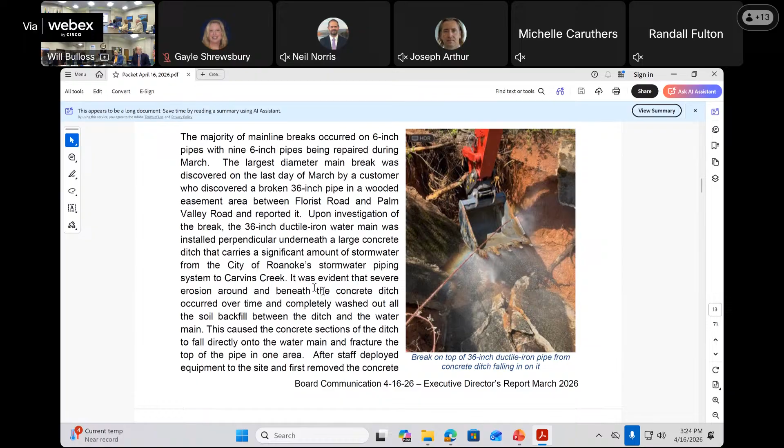It's every month, and we do quite a lot of line location work. We also contract with the Roanoke Valley Broadband Authority to locate their fiber for them as well. It's just a way to help them out.

One thing I wanted to point out here was we saw a pretty good jump in tickets in March, similar to what we saw in March of 2023. Line location tickets are a good leading indicator for future development. When engineers and contractors are calling in for tickets, that means construction's about to happen. You can see a trend here where we had a dip, and then construction tickets rose in March, which is the traditional time people start calling in because they're planning to do construction in the summer.

So there's a lot there to get to the point that we think construction activity is going to be heavy this summer.

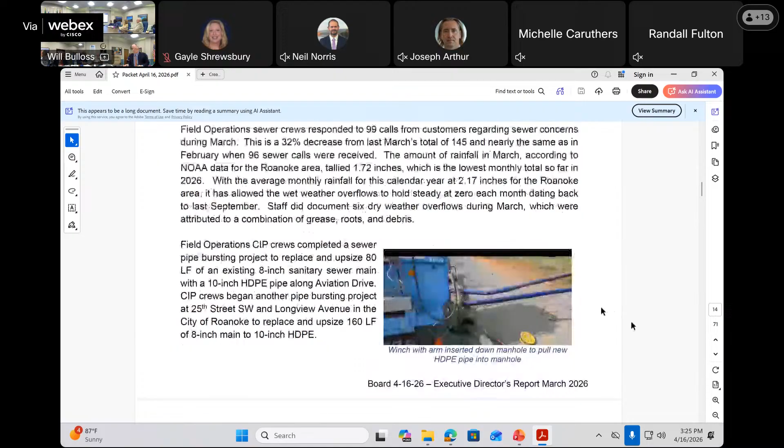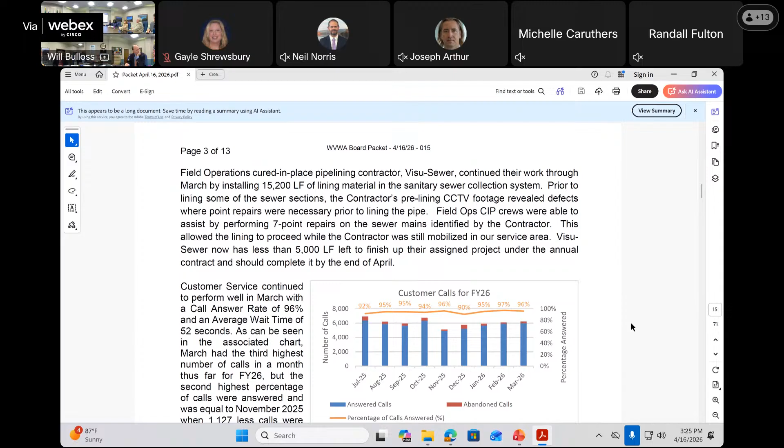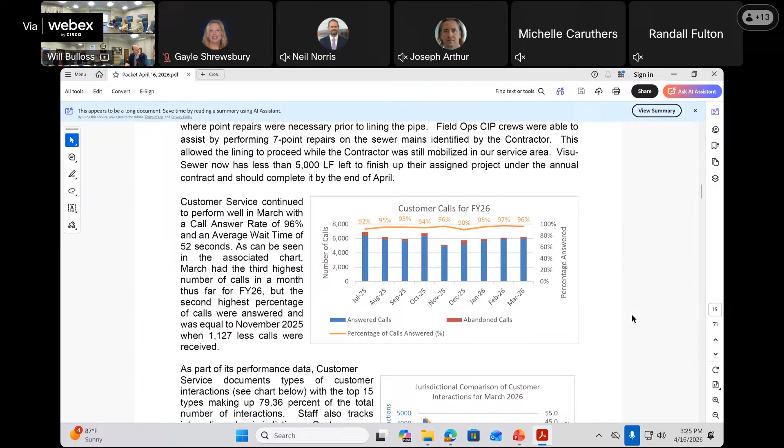Liana's team, this is on pages 3 and 4. In addition to all the other things they do in customer service, one thing they track is the types of calls we get. At the top of page 4, there's a graphic showing how we categorize those calls, and we also categorize them by locality, so we're keeping track of both the types of calls and the locations they're coming from.

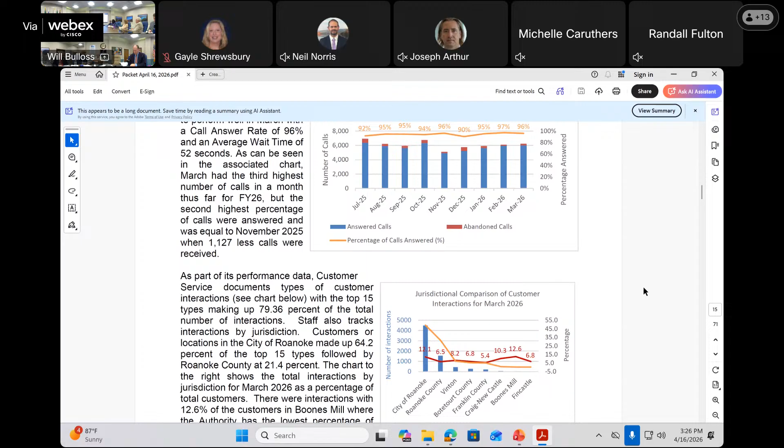She's got a list of the top 15 call types we saw through March. This is pretty typical most of the time. You can see most people are calling with an inquiry about the bill, a transfer, or how to restore service, possibly because they've been disconnected for non-payment. You can see some of the other types of calls customer service gets in a regular month. Liana, did you want to add anything?

Yes, as we get into the summer months, the three months, you will see how the transfer service notes increase. That number on the...

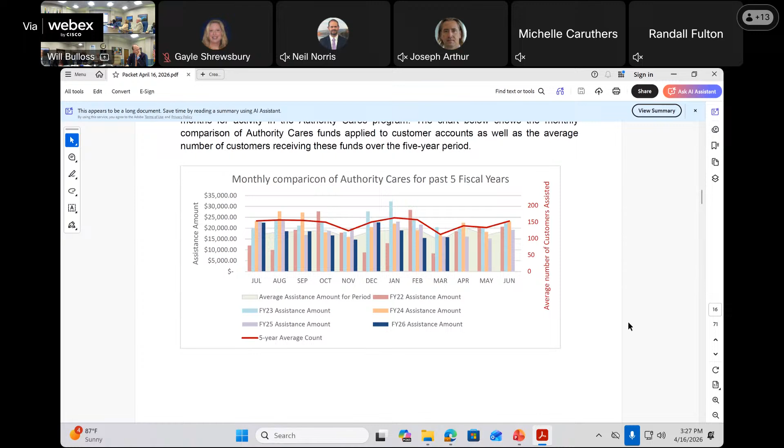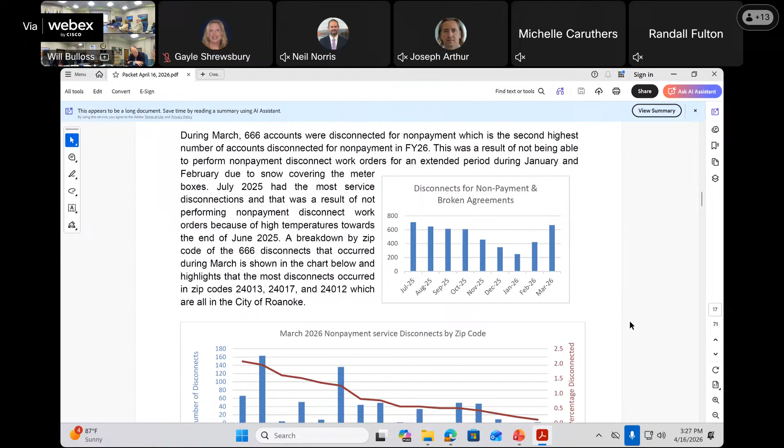On the next couple of pages, you can see information about our Authority Cares program and the number of disconnects for non-payment. We did have a jump in March because we weren't doing a lot of that during the winter, so some customers were able to ride along a bit, but we did see a jump there. Again, it's also broken out by zip code.

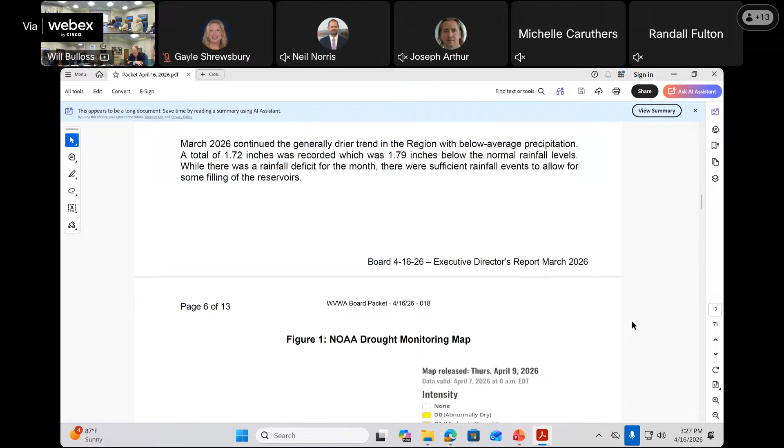Page 6, it was mentioned that it is dry out there. A good part of the area we're in, and a good part of Virginia, is in stage 2 drought. Fortunately, none of the Commonwealth. The graphic that came out today has those yellow, light tan areas showing moderate drought. There's a pretty good sized drought going on throughout the southeast part of the country. In the lower part of Georgia and northern Florida, they're in an exceptional drought, that D4 range.

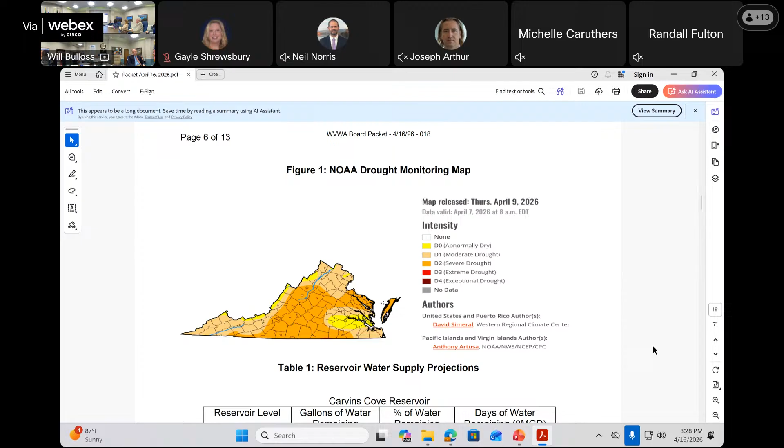The good news, which we talked about a little last month, is that the National Weather Service Climate Prediction Center, based out of Asheville, North Carolina, is again predicting a weather pattern flip, going from a La Nina year to an El Nino year. For the Mid-Atlantic, looking at their climate charts, that means significantly above average chances for rain in May, extended through October. So we're expecting a wet summer and early fall with that flip from La Nina, and we'll likely see some relief on the drought.

We have a long list, I think, of programs people don't qualify for here. Typically we don't have a lot of criteria to qualify for us; it's usually that they've already...

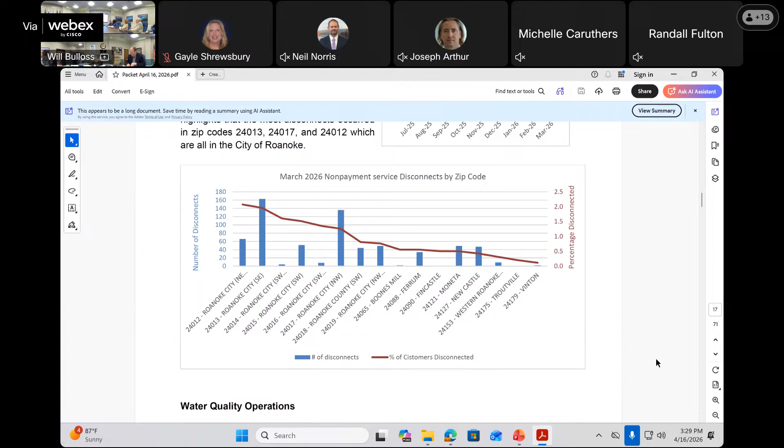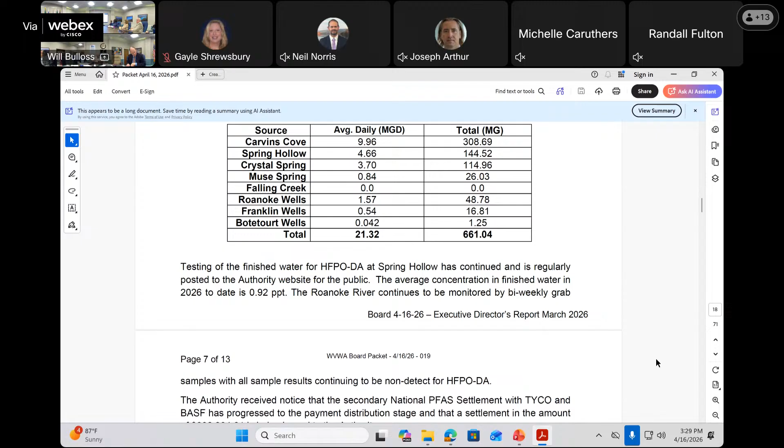Do want to point out though that the reservoirs are still looking pretty good. Carvins Cove is at 78% capacity, 78% full. We've really added a lot of water at Spring Hollow. We're at 90, the report says 94 there. I think it's dropped a little bit to 90, a little less than 94. It's 93 there. So looking good again as far as storage goes.

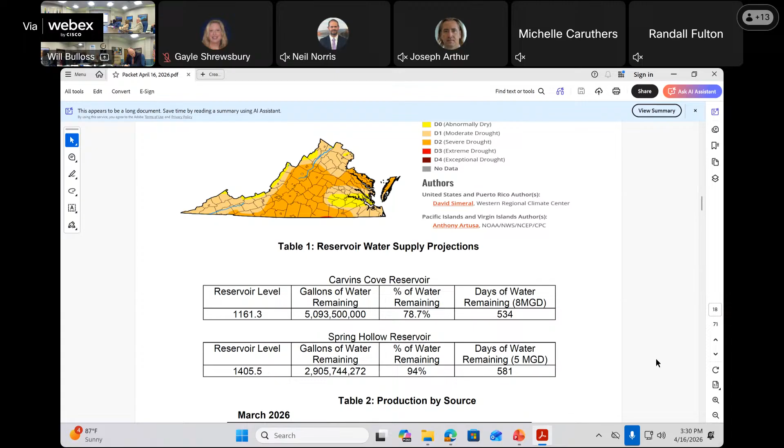Scott Shirley let us know he'd gotten notification from the national PFAS settlement group put together to handle this class action National Settlement Center. Two of the other participants in that suit, Tyco and BASF, were smaller organizations compared to DuPont, Chemours, and 3M, but they have a share in the cost. We're going to be receiving a payment from them soon, $602,000 for the settlement. Actually, we got notification the check's been issued for 400-something thousand of that amount, so money continues to come in associated with that class action.

We are working quite a bit with both the health department and a number of water systems in Franklin County to transfer those over to the authority. I just got contacted by another one that would like to turn over their operations to us as well. Don't know if it's just the cost of operations. The one that recently reached out is having a bit of a problem with their well, so they'd like to start buying water from us. I think we have at least 4 of these in Franklin County at this point, and they're all pending.

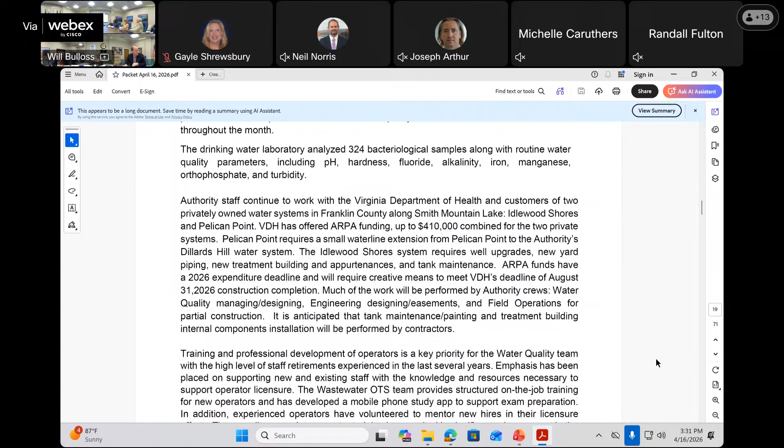Very excited about the fact you can see at the bottom of page 7, we had a number of employees pass either their water or wastewater operating licenses, all listed there. So obviously getting our folks licensed and higher licenses. The licenses, 1 is the best, it goes 1 down to 4. You can see we have some new employees that just got their 4s, and some employees who've been with us a few years that are just getting their 1s. So very excited about that. And there's a promotion that goes with that licensure.

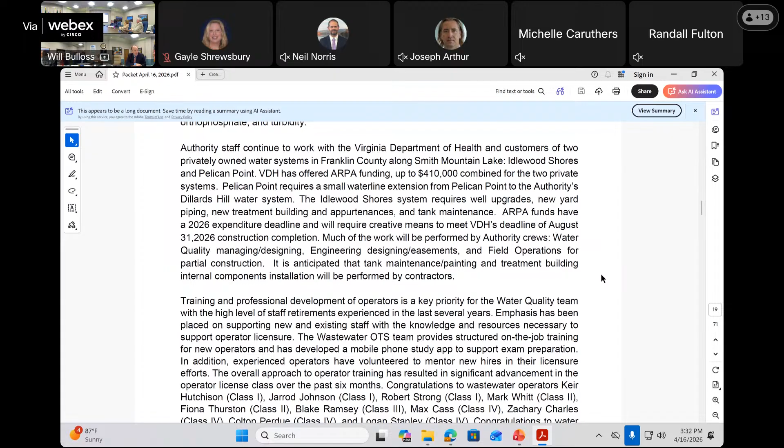Yeah. Before that, actually they're trying to get us by August 30th. Oh, I know why. Yeah, so it's gonna be tight, but we're trying. Oh, but they didn't. Yeah, exactly. Yeah, okay, sure. Yeah, they have essentially leftover money from other projects, they said.

Top of page 8, I think we've mentioned we had some screen failures up at Spring Hollow for the filter units up there. Those screens have come in, so we're starting to replace them. And there's pictures of our team going up there doing that work.

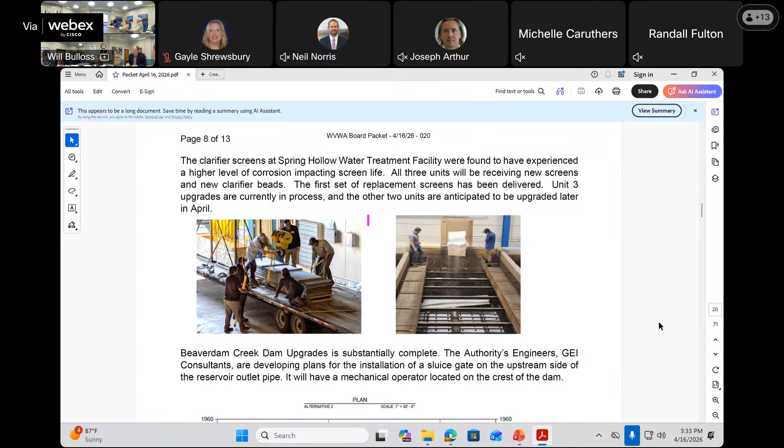Page 9, I just want to point out, it's a small item but I think we're pretty proud of it, that picture with the Ferrum water plant, the 2 white tanks there. We took that facility over a few years ago, and it operated well, but maybe wasn't, I'll use the term Gary liked to use, wasn't as spiffy as we like to see it. So we had a little project there to do some repairs, some painting, refinish the floor and everything like that. And it really has turned out nice, the facility looks really good.

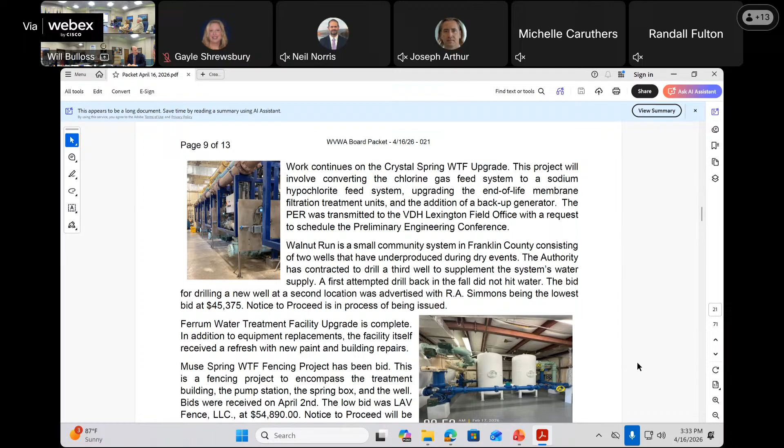Then at page 13 under administration and engineering, I mentioned this to the IDEA team last week, but we had a really successful high school apprenticeship recruitment season. A lot of that goes to HR, Neil and his team, especially Mackenzie Wilcox, and Sarah and her team. We were able to sign 5 new apprentices. We had 9 or 10 apply, interviewed 9. You had to come on the tour along with your parents that we did in February, and that was the day it was bitterly cold. So if you showed up for that tour and went around all our facilities, you definitely were interested in the job, but it had a really good turnout. We have a long history with the school systems on these apprenticeship programs, and there are so many other groups now doing them that it's become a bit of competition to find apprentices. It's a little bit of a challenge for us, so we have to be creative and show them what we do to get them interested. We had a good turnout this year.

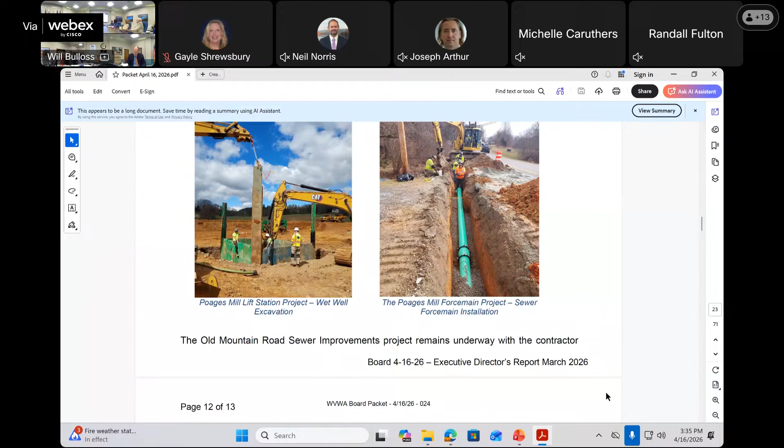This is something I'm excited about, top of page 11. We are about 400 feet away from finishing the Melrose Avenue Waterline Improvements Project 1B. If you remember, we got a bunch of financing funds from the bipartisan infrastructure bill, and we divided those up into Project 1A, which we've already completed, 1B, which we're about to complete, and then we have a Phase 2 project we're working on as well. We've replaced 16,000 linear feet of pipe in the Melrose neighborhood. Congratulations to Kesha and her team. I think she's going to talk about that more during the presentation later today on the capital program. You can see some of the other projects we have going on there.

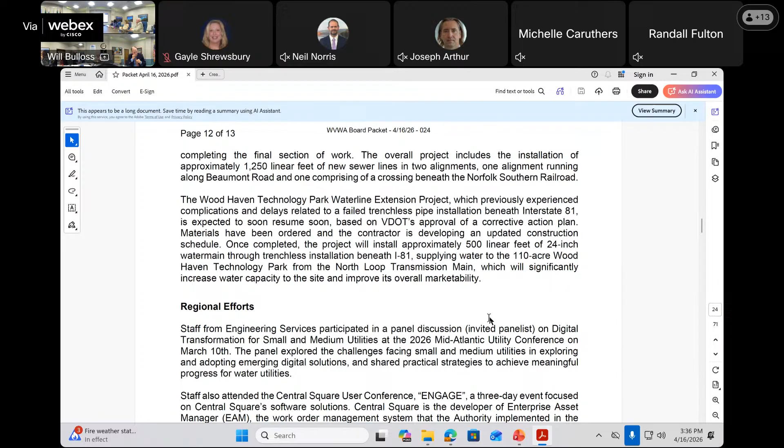Then on page 12 under regional efforts, our staff have been participating at conferences and doing presentations. We've had staff at a couple of different events. A great picture of Erica, who heads up our GIS programs, at the Central Square Users Conference, that's the software we use for our work order management systems. Erica manages our GIS and is working on integrating the work order systems with our GIS more seamlessly. And Sarah and her team submitted some abstracts, this is the last page of the report, to the NACWA Strategic Communications Conference, and all 3 were accepted.

So they submitted 3 abstract ideas, and all 3 got accepted. So we'll have a little bit of a presence at that conference coming up in June.

So, and with that, Mr. Chairman, happy to take any questions. Thank you, Mike. Apologize for trying to shortchange you there. That's all right, just for Mike.

Going back to the issue with the wells at Bent Mountain, does it make sense, or is it possible for those projects to get a deadline? We're going to actually talk about that. We want to thank Tesha and her team because they already had kind of the capital plan figured out, and then we jumped in and said we need to move these around. They were already under design, but the pump station probably wouldn't have been funded till next fiscal year, fiscal 28. So we moved a project around into our debt issuance that we want to talk to you all about. We're going to cash fund the pump station in the current year, and also issue debt for the pipe project. So we have accelerated the financing for those projects.

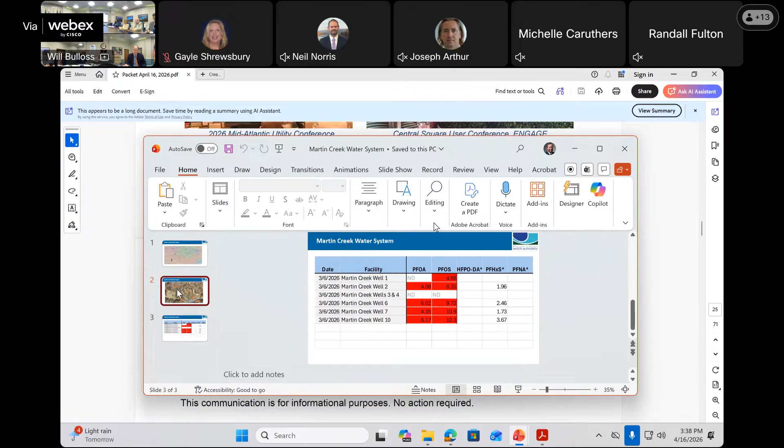Makes sense. Maybe I have one question about that. The existing wells are getting water up to the tanks today. What pumping system is used to move the water? It's just the pumps in the wells, and then there is one booster pump station, a little booster pump. There's no way to get it up the hill until we do. We might be able to do something interim, but we need to get the pipe out there.

And again, the pump station, ideally, we'd like it to be way bigger than we'll need for the elevations at the higher point here. We'd really like to find a location for a new tank, a future project, even at a higher elevation, and get rid of 2 existing tanks, so we could serve a larger area with them. Maybe some development opportunity out there. Exactly, something might happen.

We're preparing for that. I'm also curious to figure out again why wells 3 and 4 at the bottom are not impacted. Again, we think it's the creek, but to Randall's point, that's a shallow... I mean, these are deep wells, so you kind of wonder what's going on there with the geology protecting those compared to the others. So we have a little bit of work to do to figure that out.

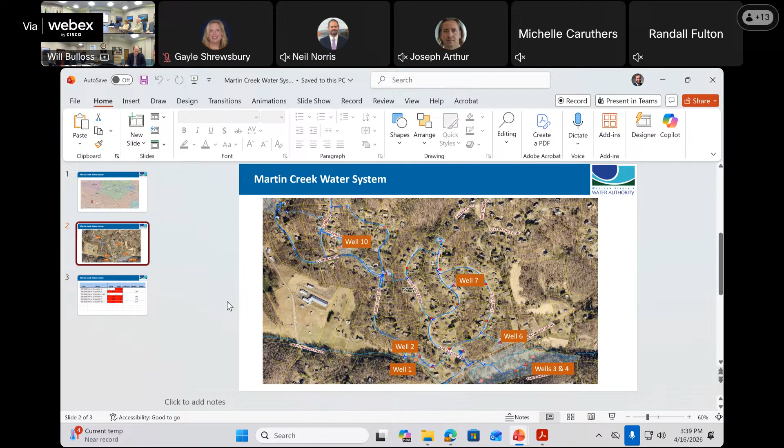Any other questions? Okay, there are no other questions. Now time for the financial report, Tammy. I have financials for the month of March.

Questions for Tammy? If you back out the contributed capital of both the water and the sewage, when that's way over the budgeted amount, if you took that out, would we still be at goal? Thank you, I couldn't do the math in my head. No, we're having a strong year for this.

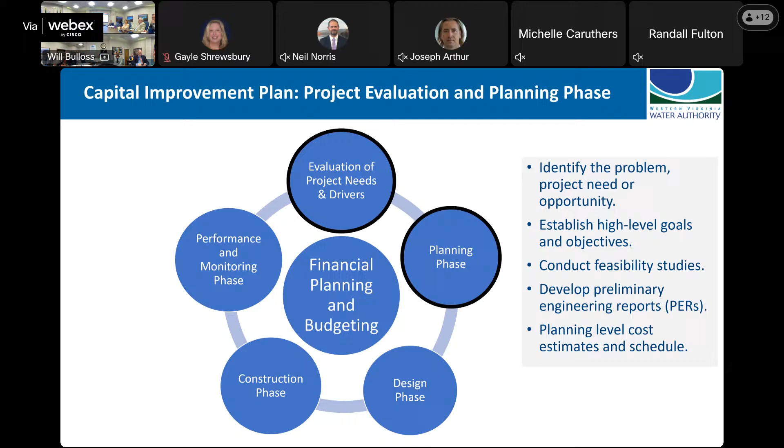In terms of the planning projects that are funded, I'd like to highlight the sewer master plan. For this particular project, we developed and calibrated the hydraulic sewer model, and this model is being used to identify capacity constraints in our sewer system.

The image to the right shows red dots. These are areas where we have potential for capacity limitations in our system, along the Roanoke River Interceptor and the Tinker Creek Interceptor.

This fiscal year, we conducted detailed condition assessments of the Tinker Creek. Next fiscal year, we are starting to work on projects in terms of the planning phase for the Roanoke River Interceptor, which is also showing us being capacity limited in various areas.

I just want to add, there's lots of green areas, and I'm pretty happy to see that because I think y'all know over the last 20 years we've done quite a bit on our sewer system to reduce inflow and infiltration and eliminate overflows.

It's been intentional that we have not worked on the old Roanoke River Interceptor or really done much work on the new, or on the Tinker Creek Interceptor. We did do some work on Tinker Creek in the 2010 timeframe, but those are our major interceptor pipes. They're very expensive, and so it's not surprising that those are now showing up as priorities.

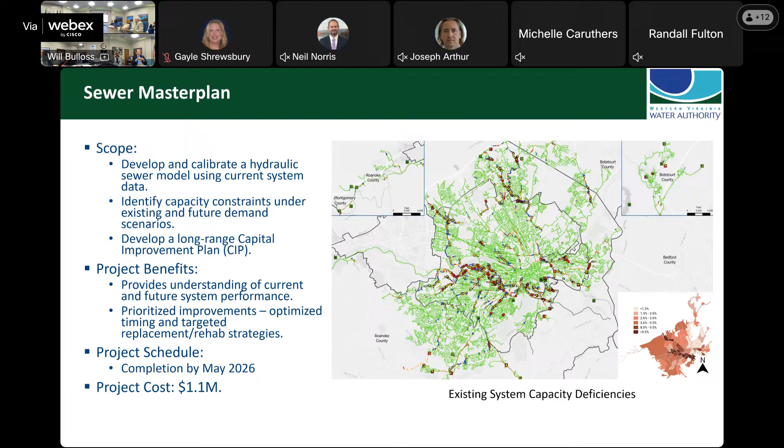Later on, when we start talking about debt, we expect some fairly heavy expenses when we start figuring out what we need to do to deal with I&I issues and capacity limitations on those two major interceptors. So, thank you.

Once we're done with the planning phase of projects, we go into the design phase and into the construction phase. This is where project costs get significant, and we have to do more reprioritization to make sure we're able to implement this project.

In the detailed design phase, that's when we have drawings, specifications, and real estate negotiations for projects that require easement or real estate to be executed.

In our fiscal year 2027 budget request, we have some funding requests for material and equipment procurement. We also have a lot of funding requests for project constructions which completed design this fiscal year. We're moving on to construction the next fiscal year.

Just to highlight, when we're requesting funding, we're doing so based on what we achieve in one particular fiscal year. We are heavy in design this particular fiscal year. FY27 will be heavy in construction.

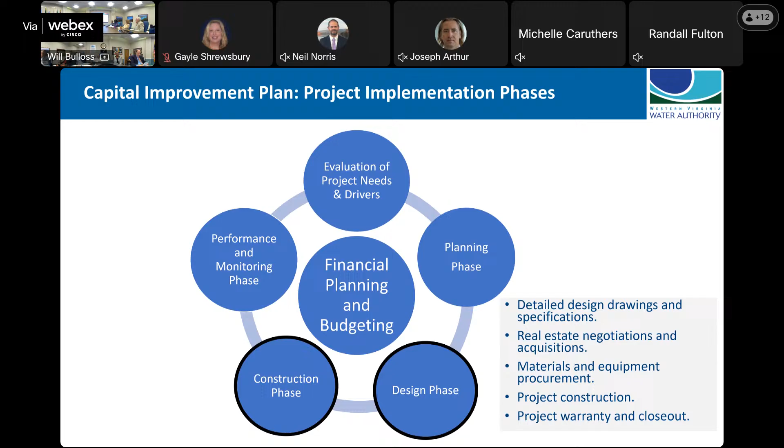As I mentioned, not all projects move into this implementation phase of design and construction. That reprioritization and looking at those projects that proceed are based on certain project drivers, and I'll highlight these by talking about specific projects that were driven by them.

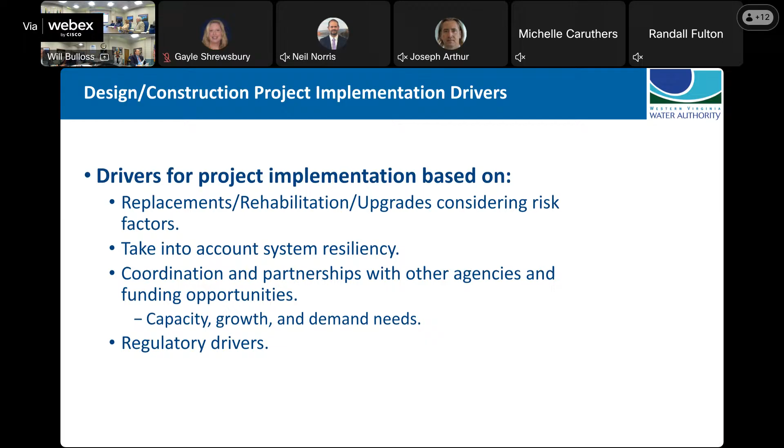The first project driver we'll be looking at is rehabilitation and replacement of aging infrastructure, based on a do-nothing scenario. So we had several rehabilitation projects, and I'll highlight some of those.

These are some of the projects that we completed or will soon complete in FY26 this fiscal year in the City of Roanoke. We are focusing on replacing small inch diameter galvanized and cast iron pipes. These are our most problematic pipes that are prone to breakage and failure.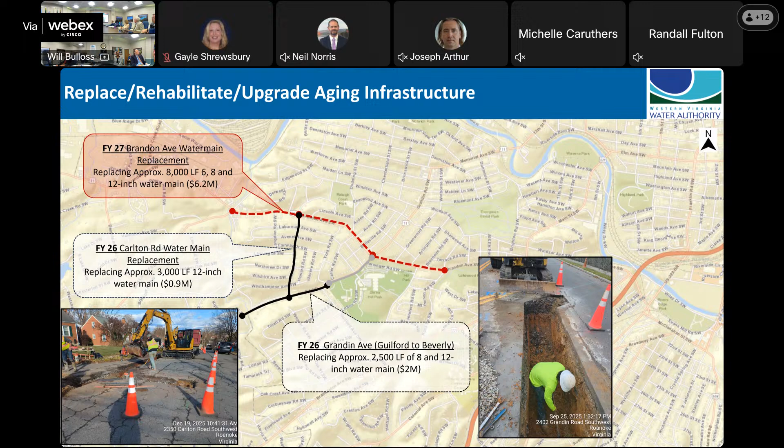Still on Roanoke City, Mike had mentioned the VDH funding that went into pipe construction for the Melrose project. Phase 1A was completed in FY25, shown as the green polygon to the left-hand side. Mike mentioned that we are getting ready to complete phase 1B, with only 400 linear feet of pipe left.

All in all, between that area, the Melrose area, we would have installed approximately 39,000 linear feet of pipe. These again are the small diameter cast iron pipe, and we've got a lot of funding from VDH to be able to do that.

For phase 1A, we've got 10.4 million. We got an additional 8.2 million in this fiscal year, and we're completing design for the VDH Phase 2 project, which is in the Williamson Road area.

This is also being done in collaboration with the City of Roanoke Department to make sure that we have coordinated paving, so that our pipe goes in before roads are actually paved. We got an additional 10.7 million in VDH funding to install an additional 11,000 linear feet of pipe. We'll be starting construction on this project within the next fiscal year.

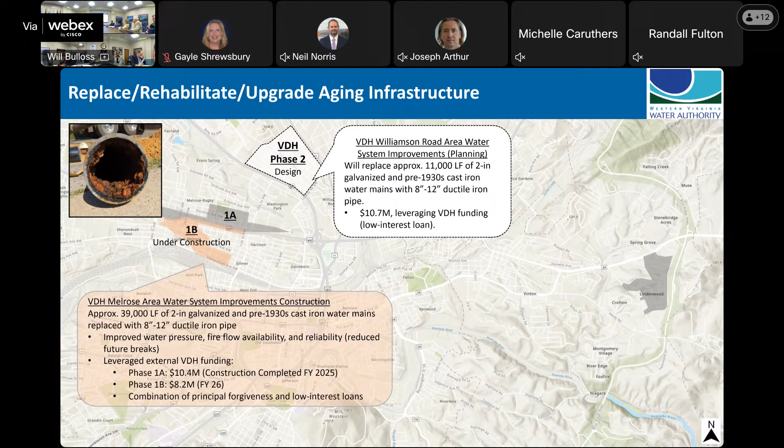Right, we talked a lot about water distribution lines. We also have a project that replaced sewer lines, and sewer lines are what's really concerning when it comes to health. We try to avoid SSOs, sanitary sewer overflows.

This is a particular project where we replaced capacity-limited sewer pipe running along Commonwealth Drive, crossing through Merriman, shown in that light green line, and through Starkey Park. So we placed 4,900 linear feet of pipe.

The project is completed. Part of the alignment along the park follows the back creek, and the original pipe was also very prone to failure because of erosion of the creek cutting back towards the pipe. So this new project moved it further away from the creek, and it's going to definitely protect the pipe. This project has been completed this fiscal year.

This park is one of the more heavily used in the county system. It's a small issue, but by running the sewer line there along Commonwealth, we actually provide an opportunity for a small building to connect - Sarah actually helped with this - it's Chris's ice cream or Chris's custard. It's the location they moved to, so that place didn't have sewer access.

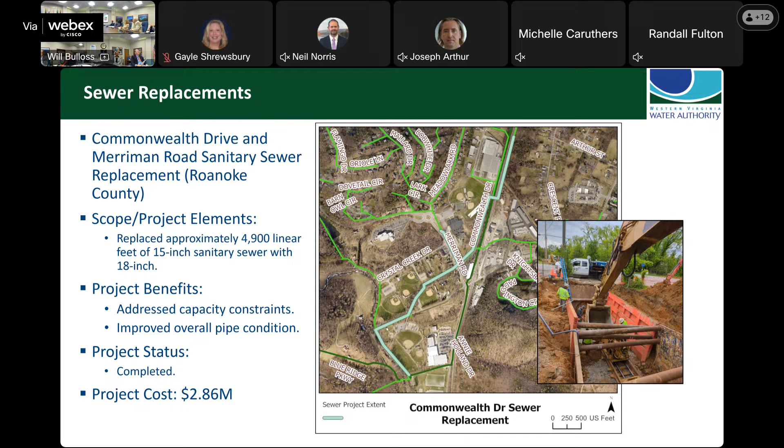So all in all, these are some numbers of what we achieved. In terms of water main replaced, we replaced 59,000 linear feet this fiscal year. In terms of water main added, that's the extension project, we had 15,000 linear feet. CIPP linings of sewer, we achieved 33,000 linear feet of linings, and this is a more cost-effective option than sewer replacement. For sewer replacement pipes, we replaced 7,400 linear feet, and we added the same extension with sewer main as water main, which is 15,000 linear feet.

So we'll move on to the next project driver, looking at increasing system resiliency. My definition of system resiliency is just the ability of a system to bounce back when we have a disturbance. The disturbance can be any issue.

So the background of the Spring Hollow project, this is the granular activated carbon project, all stemmed from the Water Authority detecting PFAS in our Spring Hollow reservoir. The GAC facility's primary purpose before PFAS was detected was a polishing step to remove turbidity and odor, ahead of the disinfection process that follows in the back end of a water treatment plant.

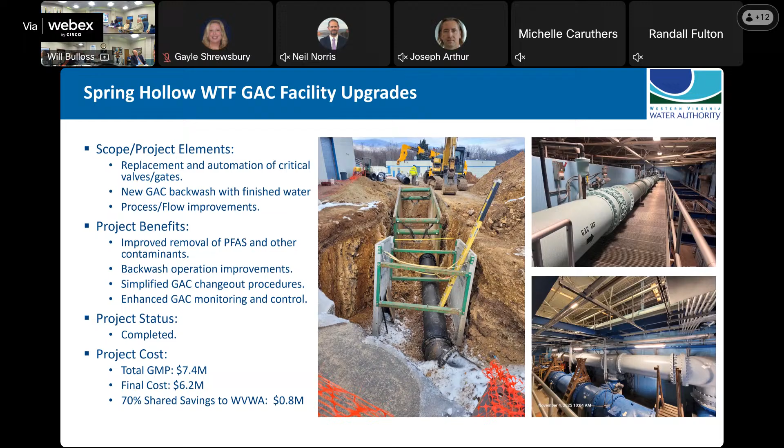Looking at the same system, this shows the site layout of the Spring Hollow water facility. The GAC is on the lower part of the image, showing the improvements that took place there. This fiscal year, we're doing design for a new clear well system, shown on the top of the image. The GAC system, as I mentioned, requires frequent backwash to remove PFAS contaminants.

To be able to have those frequent backwashes, you also have to have a higher water supply. The clear well provides that additional capacity needed for this function, so it does support the GAC backwashes. It also provides redundancy, as we have only one clear well in our system. This particular project is, as I mentioned, 60% in design, with construction later on this year. And this is another project that's funded by...

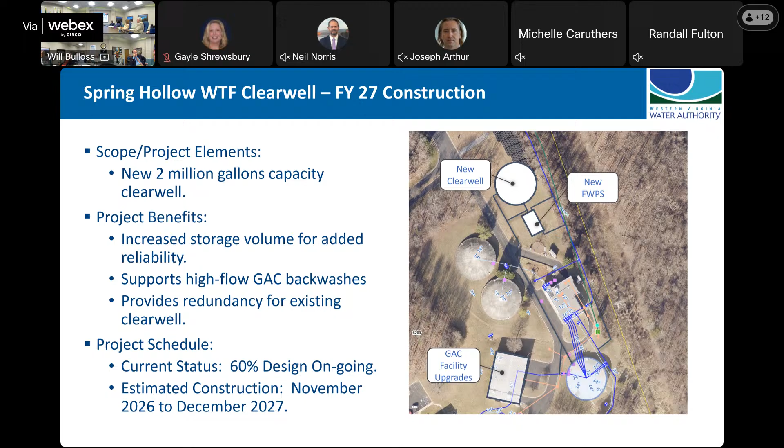Related to that project as well, new pumping stations. Right now, the current pumps are mounted on the existing clear wells, and that makes operation and maintenance extremely difficult. We're going to have a dedicated pump station with new pumps located in the dedicated pump station. The total capacity for those will be 18 MGD, and this will help with the added capacity to the distribution system as well as the plant needs.

This project is also in design, and we are estimating to go into construction in March of 2027.

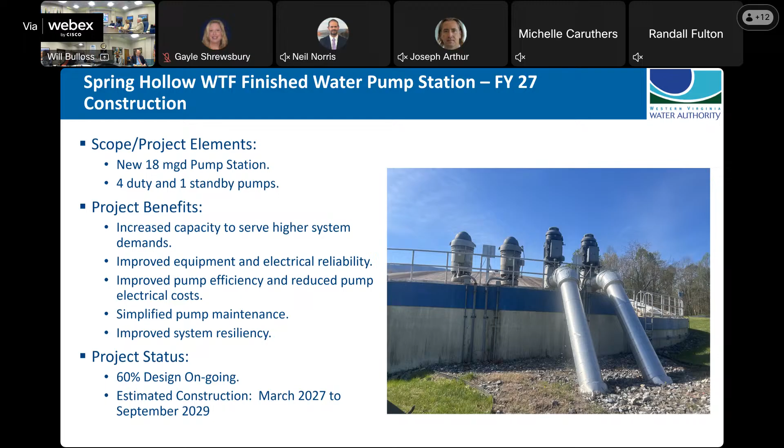So we hope you have an opportunity to visit the Beaver Dam project, but this is a project that required a lot of earth movements, a lot of construction grading.

One of the project goals was to upsize and improve our existing spillways. That's shown as the little steps, the cascaded spillways at the top. When we improved that spillway, we also added a drain pipe, which improved dam seepage and controls in a better way. That's shown in the circular area, the pipe that was extended that drains into the spillway.

We also added new riprap to prevent erosion in case of any event the spillway is used. So basically, the spillway is important because you don't want the dam to be breached. In case of any high water levels, the water would go through the spillway for that purpose.

This project was completed using a lot of external funding, including VRA bonds and some grants that we received. And right now, it has been completed.

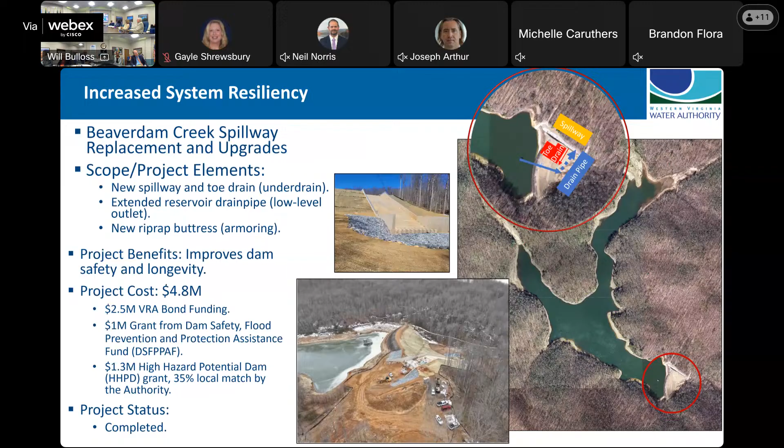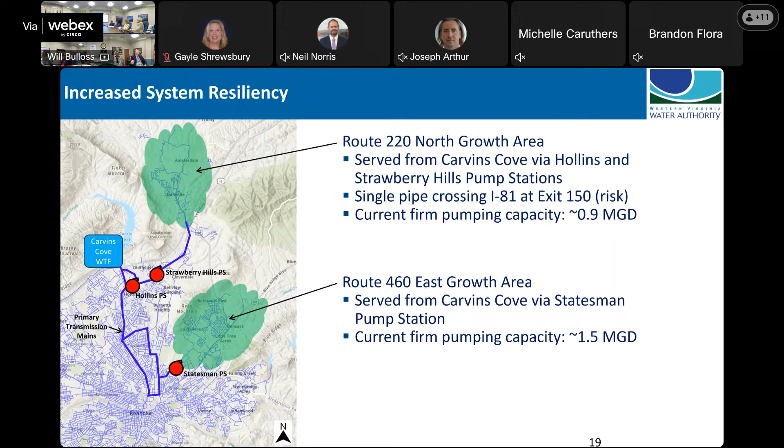For our projects this fiscal year, we completed some resilience-related projects, and one of them was related to adding an additional crossing to serve the 220 area. As you can see, there's only one line that serves that area, so the Botetourt system would not be able to have a redundant supply.

If you go into the next slide, you'll see that one of the projects we completed was the Gibson Lane project that added an additional crossing at I-81. We also increased the pump capacity by building a new 1385 pump station.

We also included improvements in the 460 growth area. This included interim upgrades to the Statesman pump station. I say interim because we have a bigger pump station project coming up. This particular project was developer funded on a pro rata basis to allow development to go on.

I'm showing the Beaverdam Creek Dam, which was improved. The Beaverdam Creek Dam supplies water to the Falling Creek reservoir, and there's potential to have redundant supply from that reservoir to the Vinton area, which is currently served by wells as well as connections to the Carvins Cove system.

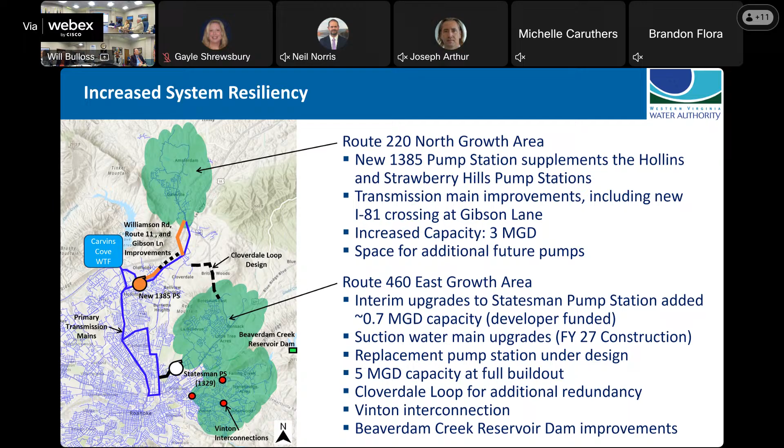This is the Gibson Lane project that we looked at last fiscal year. It was moving into starting construction. We've completed construction this fiscal year.

If you may recall, this is a project to utilize the mill race culverts and existing culverts to run our crossing on I-81, reducing the need to bore. We were able to save 1 million by using that culvert, and that was a successful project.

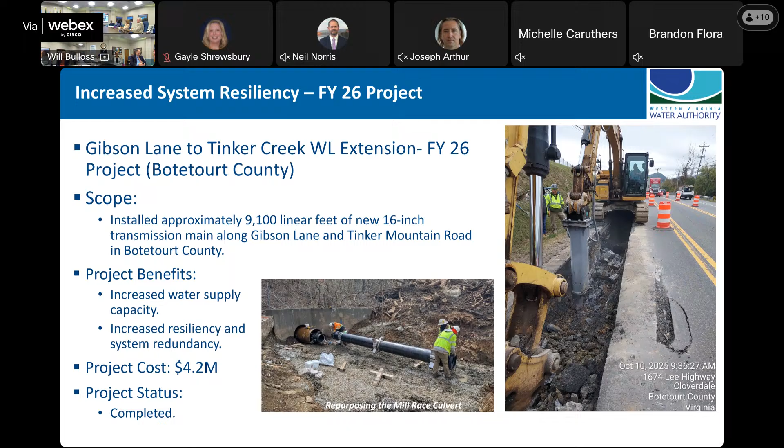This is the 1385 Hollins pump station, the new pump station that I talked about. It's currently basically completed, awaiting testing, commissioning, and project closeout.

This is the project when it was at its beginning phases. The project adds a new pump station that removes the bottleneck serving the 220 corridor, and also included installation of 5,000 linear feet of transmission.

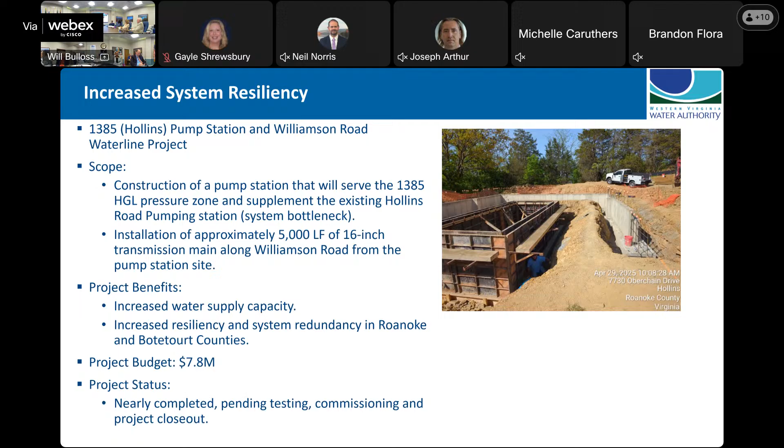Some projects that we implement are based on opportunistic combination with partnering localities. We look at some of those projects that utilize external funding, and these also have other drivers that are growth related or demand based.

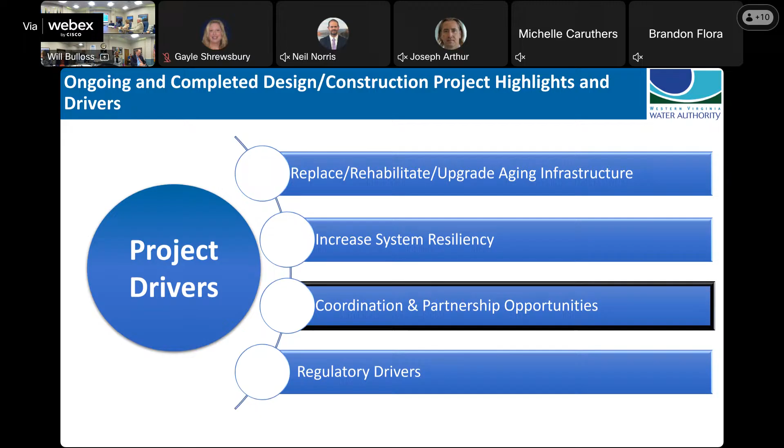Again, the Statesman Pump Station was one of those. I mentioned that it was developer funded for the interim improvement. We have the main project, which is completing design this fiscal year.

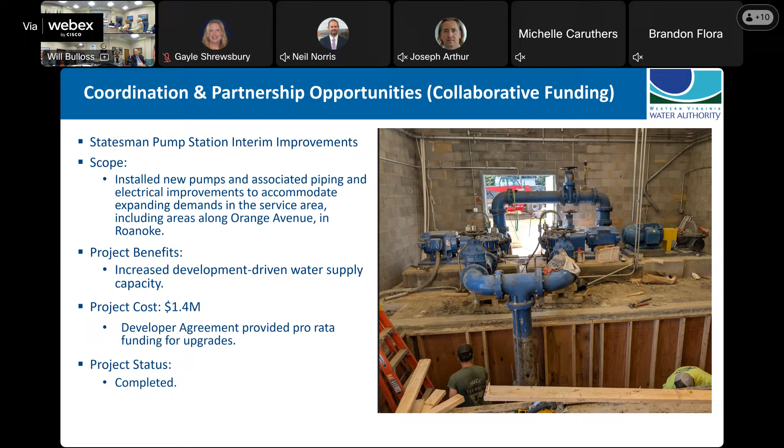Another project we have in Roanoke County is the Woodhaven project. This also received funding from Roanoke County in collaboration with the Water Authority. This project includes the installation of a proposed 24-inch diameter main crossing I-81. That pipe will improve the capacity of the Woodhaven Park.

The boring machine is shown to the bottom left of this slide. Just to mention, we've had a little bit of hiccups in terms of the bore. We found an obstruction that required us to pause the project for a while.

The boring initially started from the Woodhaven side to the Loch Haven side. We hit the obstruction, spent time trying to figure it out, and contractors have been approved to have a different plan. They'll now be starting from the Loch Haven side toward Woodhaven, but they will not be using that boring machine anymore. They'll have to hand mine to make sure their alignment is right.

Members of the board and the chairman, I'd like to emphasize that this was a guaranteed bore, meaning we're not required to pay the contractor more than what they need to have that bore guaranteed and successfully completed. They're on the hook for any of the cost here.

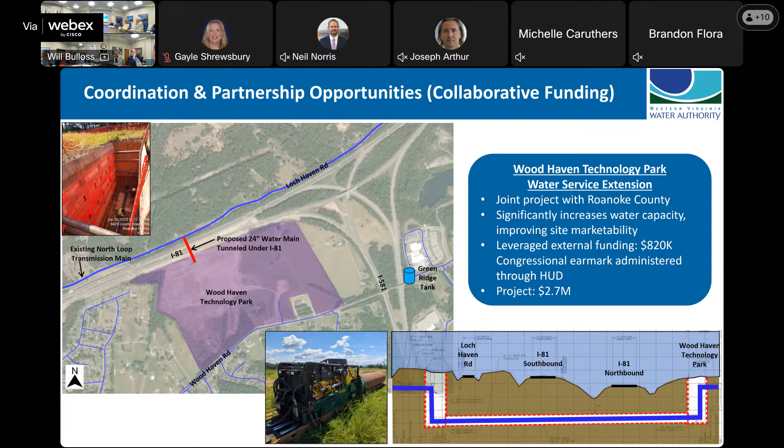Mike had mentioned we have to accelerate the phase 2 project, which extends that line further from the back to the Carriage Hill area where we have wells that are contaminated. We're expecting to move quickly with that project. We have designs ready and we'll be able to start construction for phase 2 as well, part of the FY27 project.

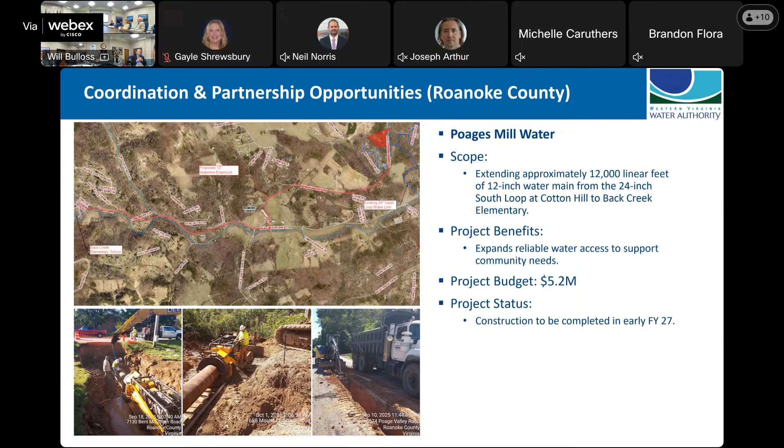It also experienced a lot of challenges with the gas main running parallel to the alignment in most of the way. We had a narrow corridor and a lot of rock to make things even worse. But this project is in collaboration with Roanoke County, where we receive funding as well.

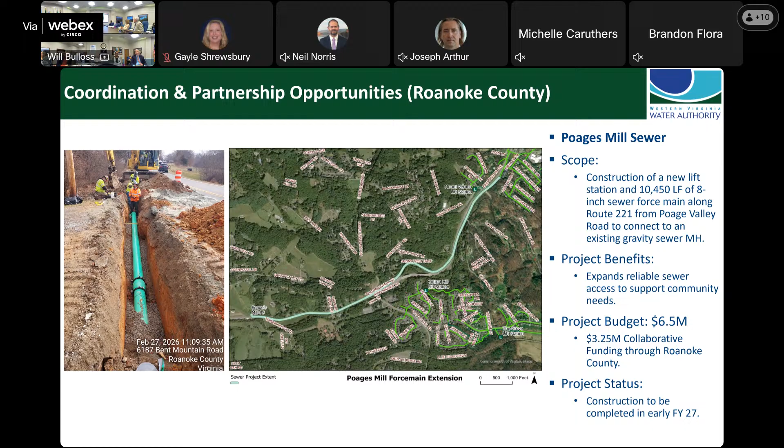We were out of luck this fiscal year with some of our construction projects, but we've been able to navigate through them well and complete projects successfully.

This is the Old Mountain Road project, which included a bore through the railroad. The bore also experienced some obstructions. The contractor was able to get approval for a new alignment, and we're working to complete the project within the next 2 weeks or so. By the end of this month, this project will be completed despite the delays facing the bore.

All in all, we also received ARPA funding for the line.

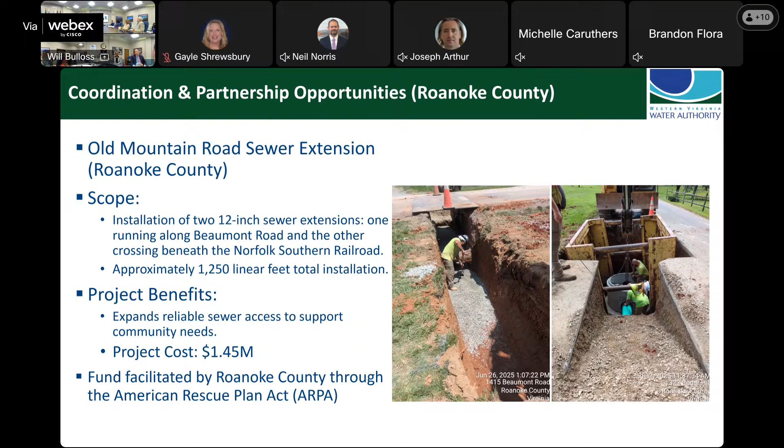Moving on to Franklin County, we've been working on different phases of the Summit View Force Main construction. This fiscal year, we installed 7,000 linear feet of 8-inch sewer force main as phase 4, shown as the cyan line at the bottom of the image. Phase 4 is to enable the Summit View Business Park to have increased capacity.

We actually completed the phase 4 project using money obtained from Franklin County to the VEDP, Virginia Economic Development Partnership Fund. That's not the end of the project; we have 2 other phases to complete. We will be upgrading the existing lift station, as well as constructing a new lift station at our waste treatment plant to increase the capacity needed to serve Summit View.

In addition, the force main discharges to the town of Rocky Mount collection system, and we have to also make improvements so that the town of Rocky Mount is able to receive that additional capacity. Right now we have funding to complete the remaining design phases of the project, including improvements in the town of Rocky Mount and the pumping improvements. We are working with Franklin County to get additional funding for the construction of this project.

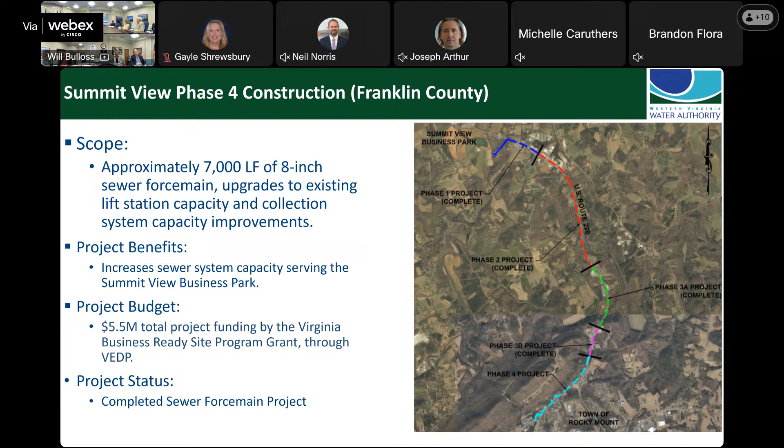We also worked with Franklin County using SERCAP funding for a planning level study. Franklin County is looking to provide sewer service in the Union Hall village, and we completed a planning study that recommended certain improvements, including a new gravity sewer collection system, a new wastewater treatment plant and drain field. We have a recommended cost of $8.6 million, and we're working with Franklin County to establish how funding will be obtained for that particular project.

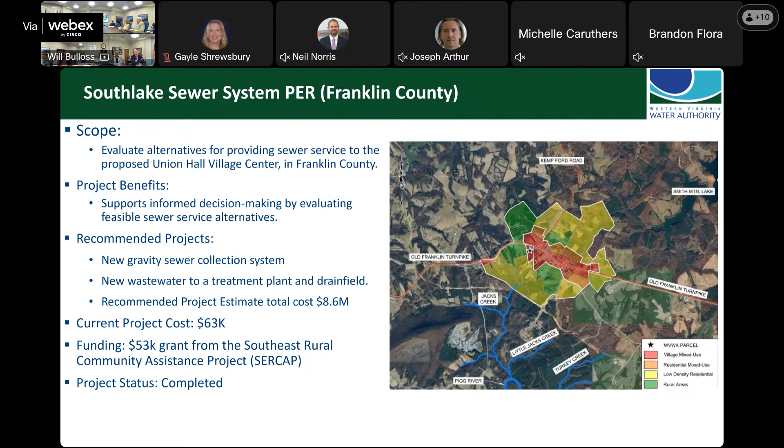We also worked in partnership with Roanoke City, and we're utilizing $3 million of ARPA funding to make improvements to the Riverdale industrial area. We've been able to rehabilitate sewer manholes as well as install CIPP lining for the sewer pipes as in-house projects, collaborating with field operations. Trent has been instrumental in getting a lot of the sewer improvements done.

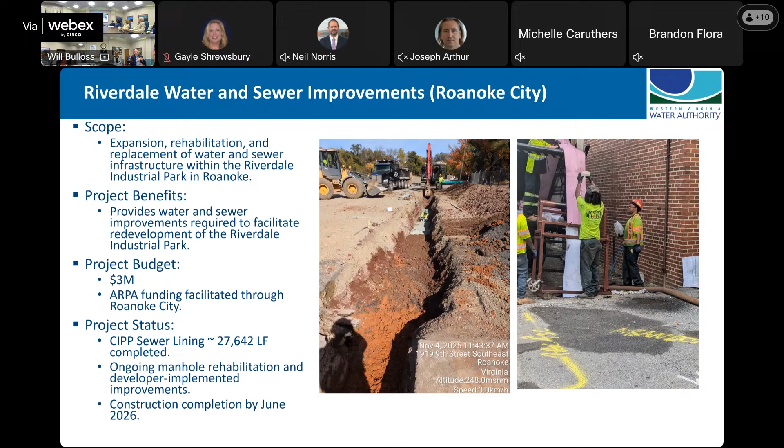We're also working with developers who are developing this park for the water and new sewer line implementations for the project. We are expecting to complete all the construction by June of this year for the Riverdale improvement.

So we've talked about the three main drivers. I won't talk about the regulatory drivers because that's integrated in some of the projects. We talked about PFAS - we are usually ahead of the game in terms of our planning needs. So we'll go to the next topic: performance and monitoring phase of our cycle.

One of the projects that we completed this fiscal year, pending project documentation, is a water quality analysis. We developed a water model to predict water age in our system. Water age is an indication of chlorine being dissipated, and it's also an indication of disinfection byproducts, which are carcinogenic. So we want to pay attention to areas that have a high water age, and this model pointed out certain areas.

One thing it didn't take into consideration is that we are flushing to reduce the water age in those areas highlighted red - the Rocky Mount area, the Grassy Hills area, and the Explorer Park area. Those are areas that are being flushed already. So what we're able to verify is that we are flushing our system in the right area, and it also highlights the need for us to continue looping our water system to avoid dead ends that contribute to the water age issue. So the project is completed, pending project documentation.

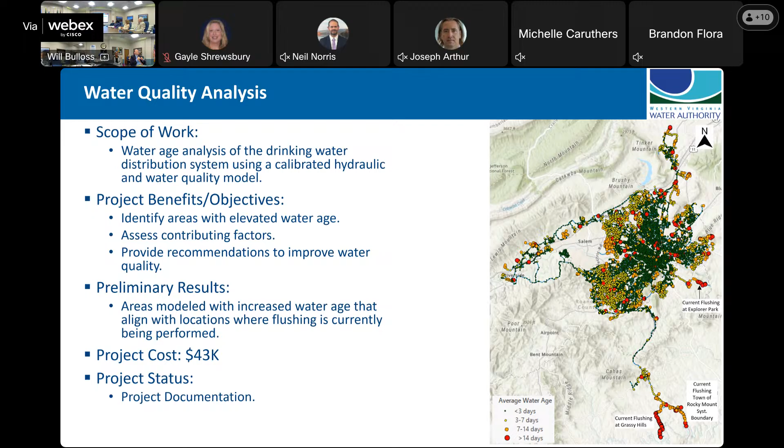We also had some internal work done by our engineering asset management team. One thing they looked at was the failure rate for our pipes based on material and diameter, and the failure ratio - the percentage of failed pipes divided by the inventory of all the pipes. What this told us is that we are targeting the right pipes. Earlier in my presentation I talked about replacing small inch galvanized and cast iron pipes.

We see that the failure rate is 5 times the expected rate. A failure rate of 1 would represent the ideal situation, so we're replacing pipes that are prone to failure. This was based on work orders from 2025 to early 2026. We also see that Roanoke City has the highest repair rate in terms of work orders received, but that's also a system that has some of these aging pipes.

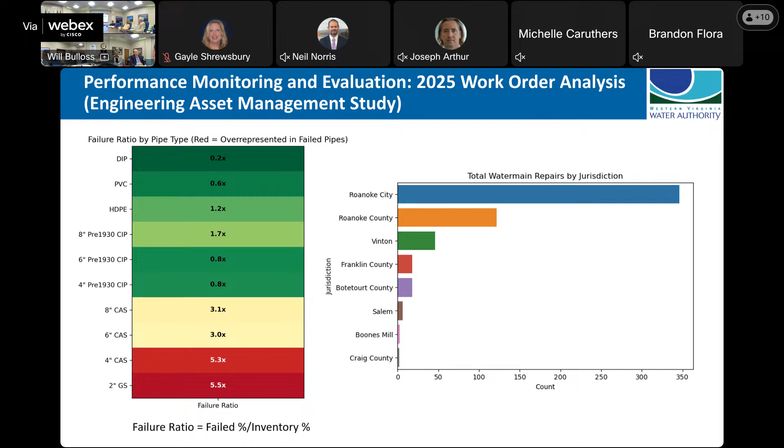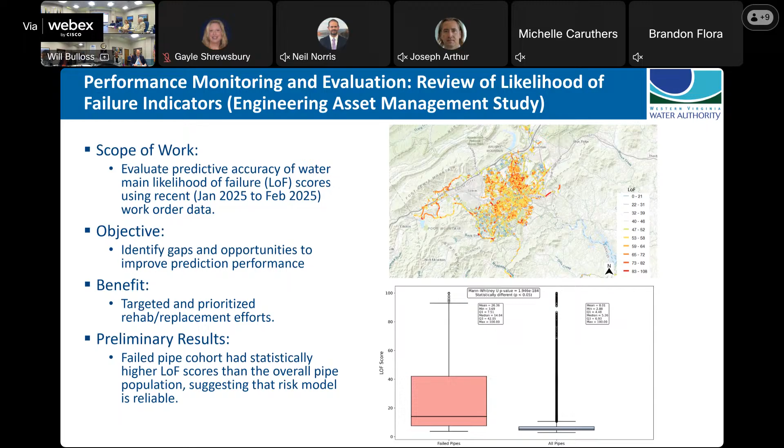We have another effort conducted by our asset management team, an internal effort to evaluate the accuracy of a model we use to predict failures. The top image on this slide shows the model predicting where we have pipes prone to failure. The asset management team did a statistical analysis to see if that prediction was sound in terms of the pipes we're targeting for replacement. The good news is that the results indicated the model was predicting correctly, and we can continue targeting areas based on vulnerabilities and high risk for failure.

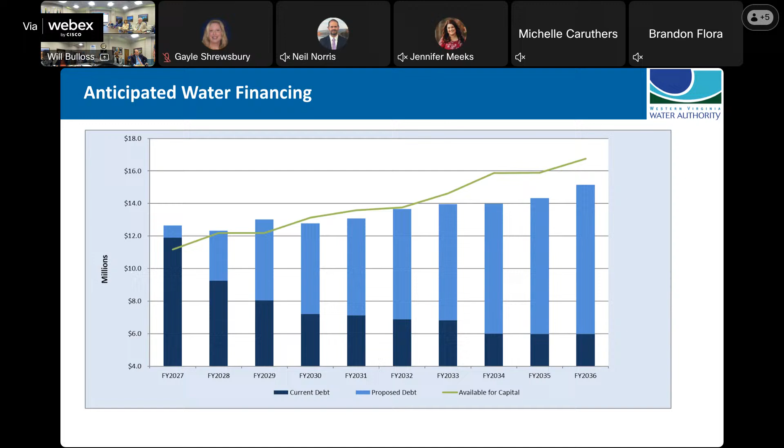So the debt service per year is lower, obviously, than the water fund, but again, it's dropping off. Scott's team does anticipate a debt issuance in '28 associated with the water pollution control plant. We've almost come full circle there - we've been working on that plant for 20 years now. We completed the plan from 2002, and now we're back to the aeration systems for the plant that we need to do some work on.

So the real unknown here, which might change significantly over the next 2 years, is what level of investment we need to do in the Roanoke River Interceptor. We use a combination of the new interceptor, put in the 90s, and the old interceptor, from the late 40s and 50s. That old interceptor needs some work, and it's also capacity limiting. So we'll be doing work along the river, very expensive.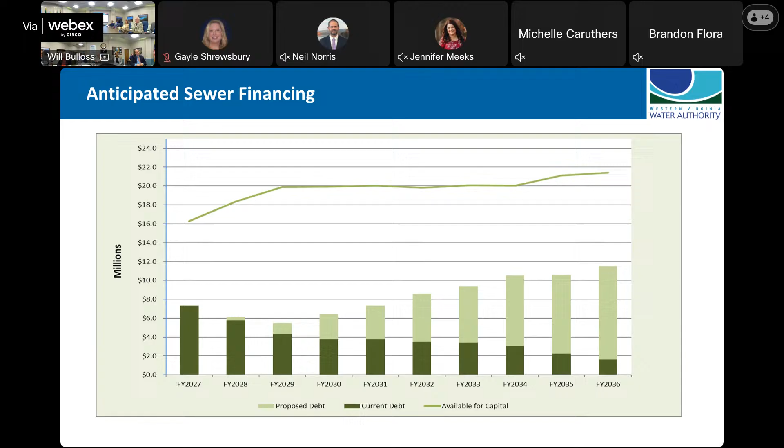So Don, this kind of gets to your question from last time, Kevin. On the sewer side, again, no change - $1.20 to the volume, an increase in sewer residential bill from 42, and typically we stay at a 3 to 4% increase in our rate. So the combined bill for a residential customer using 4,000 gallons will increase by $2.40 to the monthly bill, going from 74.15 to 76.55, or 3.2%.